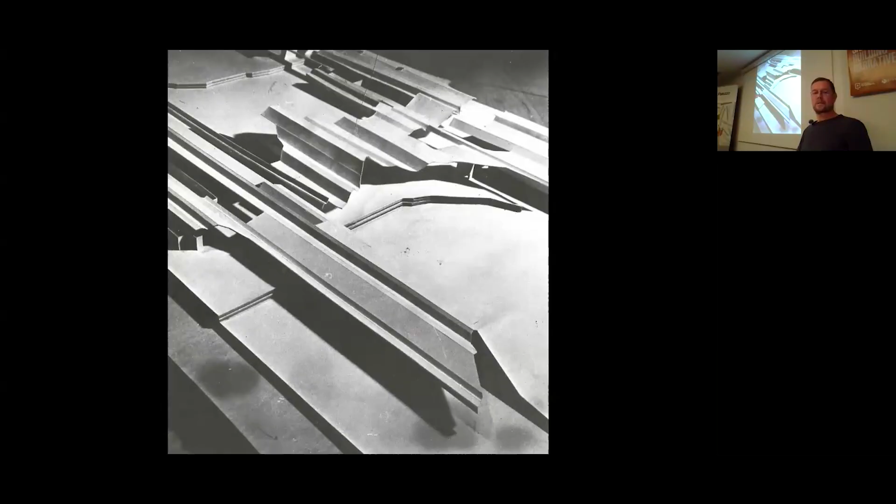But Raili and Reima Pietilä were a couple who became very well known in Finland in the 60s, and then worked through to the early 90s when Reima passed away, and they ended the office. But this is the design they made for the Finnish embassy in Delhi, in India.

And they have an interesting narrative also for this building, which of course guided all the changes that we had to do. But basically, they were thinking that if you're doing an embassy, how do you both show your own country, but also respect the country that you're in? Of course, you have to take into account the climate and building methods and things like that. But it's also important to have the symbolism and the narrative of what the Finns share with the Indian people, for instance.

And here they thought that probably nature is after all one of the strongest things, and they were thinking about the Himalayas, but also, in a way, Finland is opposite to the Himalayas, that we are a very flat country. But all of our lakes go into scratches across the country. So you can see the lakes are stripes across. And also, of course, the hills in between are in the same shape.

So this image of the building is at the same time the Finnish landscape, but also referring to the Himalayas, and bringing out the thinking of a shared respect to these landscapes.

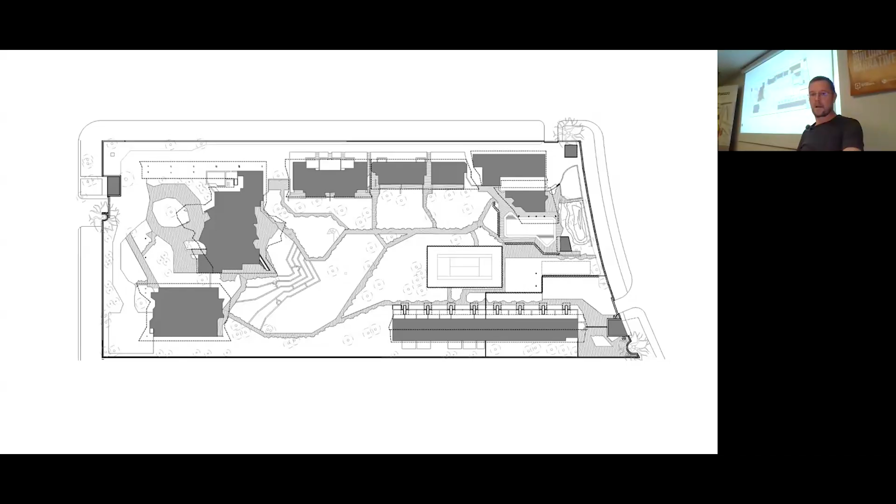And so the main building in the middle looks like this. This is where you enter to go and meet the ambassador, or to go to a party or something like that at the embassy.

And here as well, they were using the local stone, which sort of comes up from the ground. And this pattern that the stone has is something that's traditional to Delhi. This shape has been traditionally used in that area, and it's the local stone. So it's using the local tradition, but creating this quite flying, expansive, big roof that's inviting you into the building and welcoming people.

Most of this was actually more restoration than anything else, and of course security issues and technical things. So we were basically bringing it back to the original shape. Of course, changes had been made, like always in buildings.

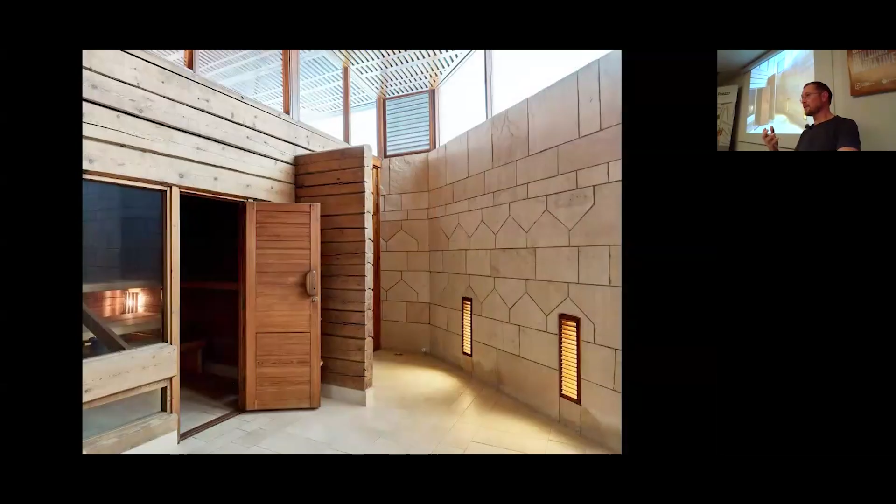This is the lobby space, and it had always been this kind of very white place with the Aalto furniture, like every embassy, as you might expect. So we renovated that. There's also a sauna. Although it can be 45 degrees outside, you still have to have a sauna. And that was logs brought from Finland, so it's a literal piece of Finland in the middle of the building.

And the new layer is basically just the new security gates. They wanted the scanning devices and things like this, and so we did these new gates. And here we decided to have some relation to the original architecture, but a different scale, different pattern, using the handcraft abilities that you can use in India, because in Finland it's hugely expensive to use handcraft to make this shape, but in India that's the cheaper choice, and it kind of makes sense. But basically, these new structures you can't see from the inside. So it was a very light touch to the building.

We also worked on another project by Pietilä called Dipoli. This is an experimental student union building for the University of Technology, which is where I also studied to be an architect. This is basically in Helsinki, in a suburb called Espoo, and it was completed in 1966. And now we changed it into the main building of the new university, which is actually called Aalto. Which is maybe a bit similar to you having Mimar Sinan here, using these names now for the buildings.

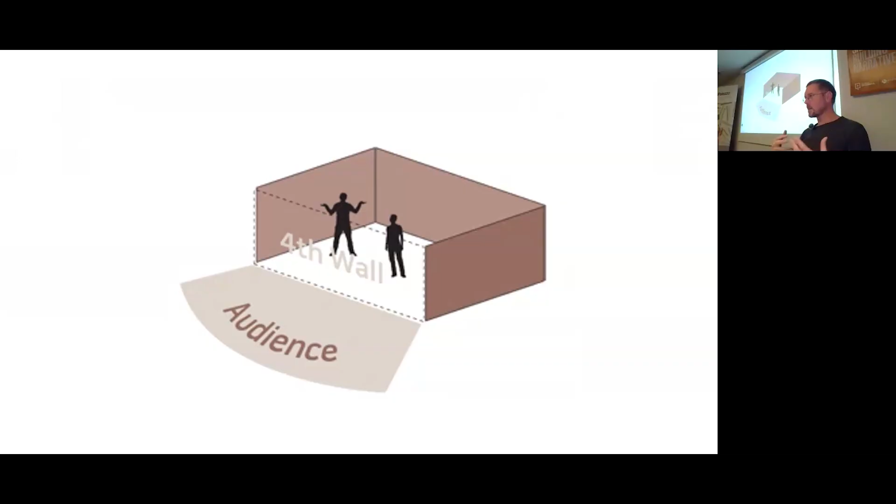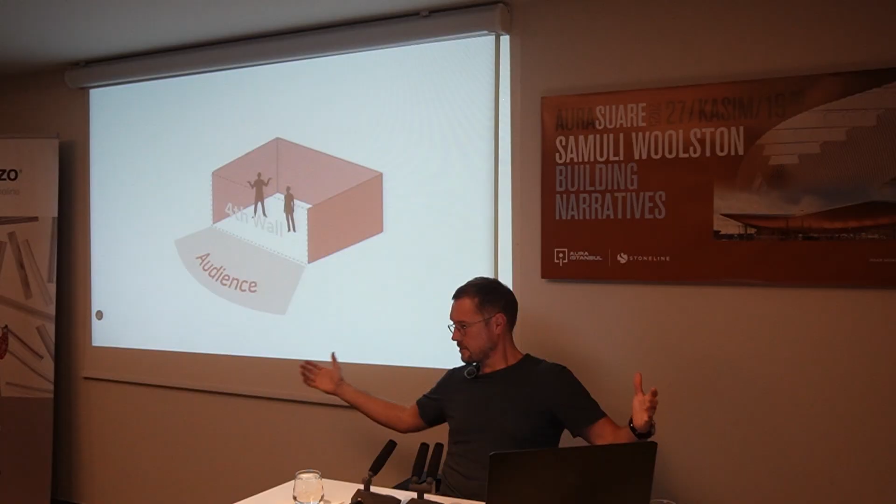And so we sort of started building up that, and then we started thinking more about what the architectural expression should be. What do we want to say? And we started thinking about the idea of the fourth wall, which is on stage: you have the three walls that you could see, which are the set, and then the actors pretend that the audience is not there. And then sometimes they of course break this wall, and they might speak to somebody directly, and we thought, okay, we'll play with that a little bit.

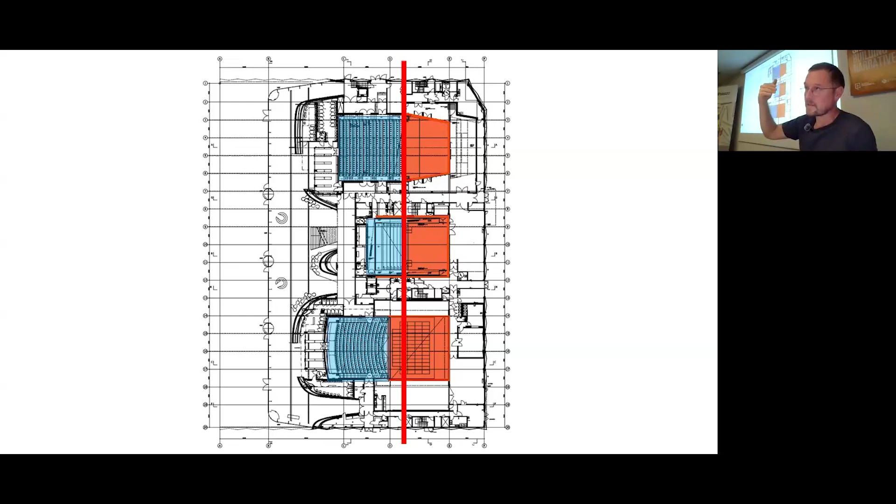Because this is the line where you could think that the fourth wall is in all of the halls. There's the stage in the front, and there's the audience in the blue area, and we wanted to move that fourth wall actually to the front of the building. So instead, all of this could be considered the back of house, and the outside life is on the outside of the building. So basically the idea is that as soon as you go through the main facade, you're in the world of the theater, although you're still actually in the foyer.

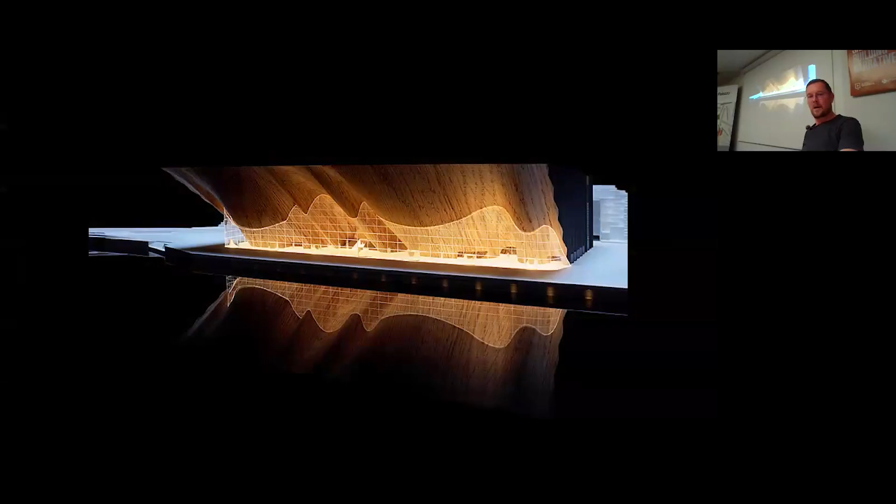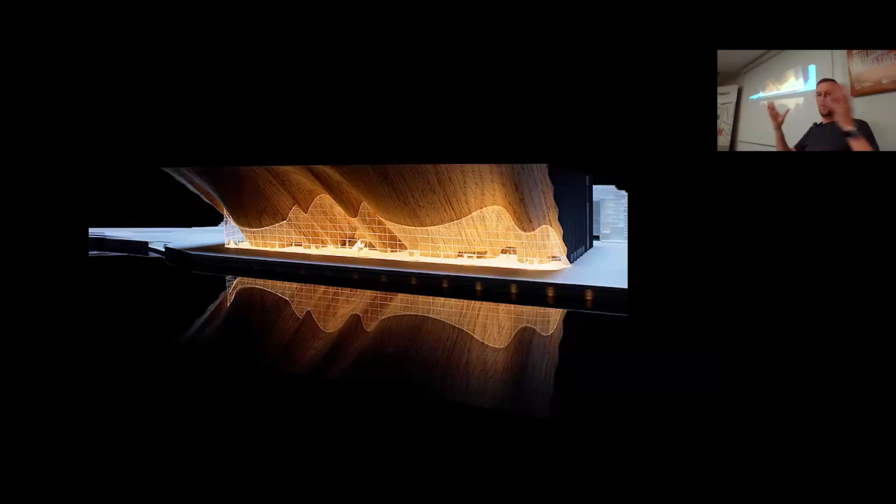But this brought out the fact that we had to give a shape somehow to this fourth wall. What does it look like? And we started thinking that instead of having the theater tower, which is blank and just a box, which is often something that you recognize to be a theater, we wanted to bring out the auditoriums, bring out the fact that this is where the people are, following the play or the concert. And so we came up with this wooden wall, which at the same time describes that we have 3 halls, but also gives it one uniform expression.

And it's using the local oak, because Kristiansand was founded in the 17th century to export oak to Europe for shipbuilding and piling of houses and such. So what made the city is oak. And for the rest of the building, we just wanted to make a simple black box. There's also an aluminium factory across the fjord on the other side, so this was also a local material. So it's really looking out into the landscape and into the evening sun. So you get these patterns, the shadows of the window mullions running across this surface in the evening when you're coming to the concert.

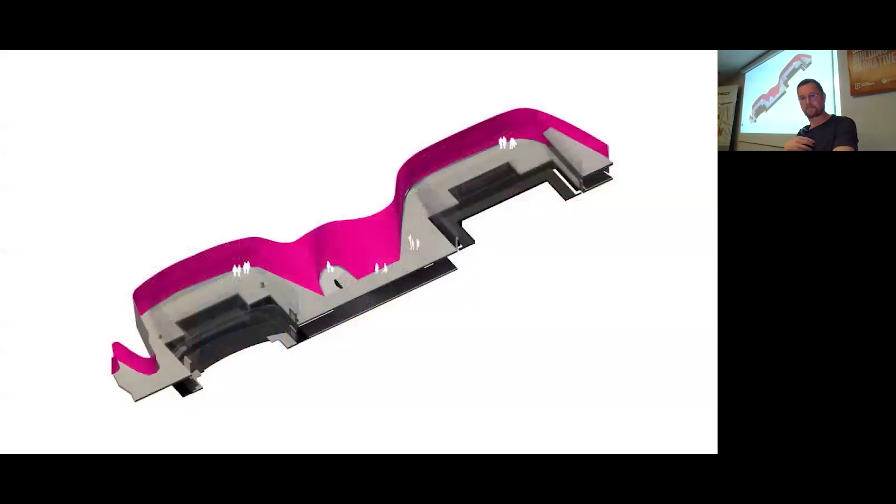But then, for us, separating outside life or reality from the fantasy of the theater, we wanted all the materials on the outside to be natural and understandable as materials, but as soon as you step inside, it becomes just color, and not natural light, but lamps and man-made light. So there's a huge change as you go through this wall. Everything changes into this man-made, unnatural in a way, fantasy side. It was a local artist who worked on the wall and made layers and layers of paint, and then sanded them down into this almost water-like surface.

And the theater hall is used either as just the ground level for fewer people, and then when you light up the top, it's more like an opera, and you have a balcony. And there's a smaller hall in between, and a couple of even smaller ones. There are 5 small halls altogether.

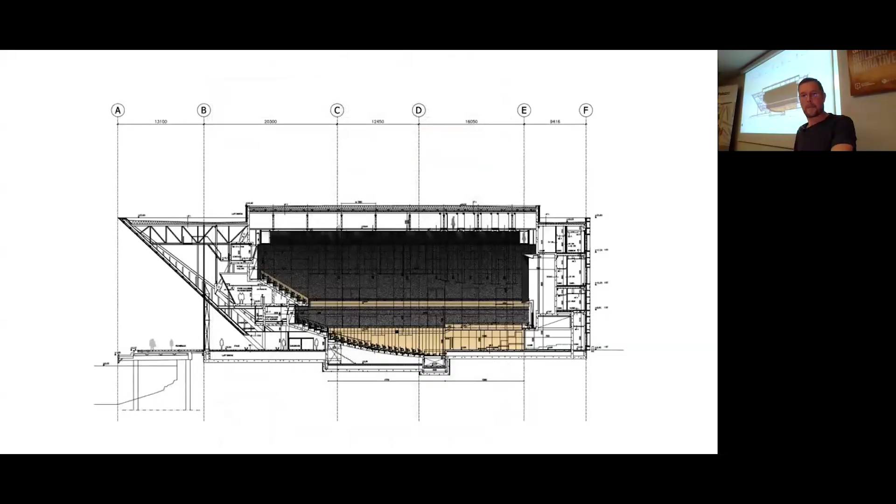And then the concert hall was more about being a sort of acoustic echo chamber. So we have this wooden vessel where the orchestra is playing, and the audience are both in this together. And then there's this darkness of black concrete, which is what the acousticians say, that you have to have heavy materials reflecting the sound for it to work acoustically.

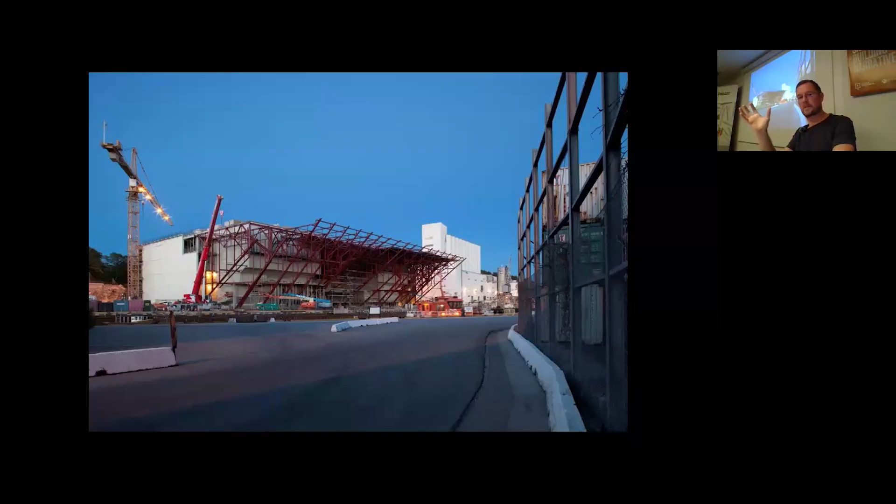There's rehearsal halls and back of house spaces, and this back wall, which in one direction you cannot see any windows, but when you look at it from the different side, then you see all the windows. And structurally it's super simple. It's the concrete halls and then this steel overhang with the wooden units installed on top.

This was actually made by boat builders just in the area in Kristiansand. Every single piece here, this image explains it maybe better, is a different shape. So every plank is actually slightly getting smaller towards the top, and that's how when you place them all into place, you finally get this shape, because the top line is 100 meters and the bottom is like 300 meters. So there's a big change.

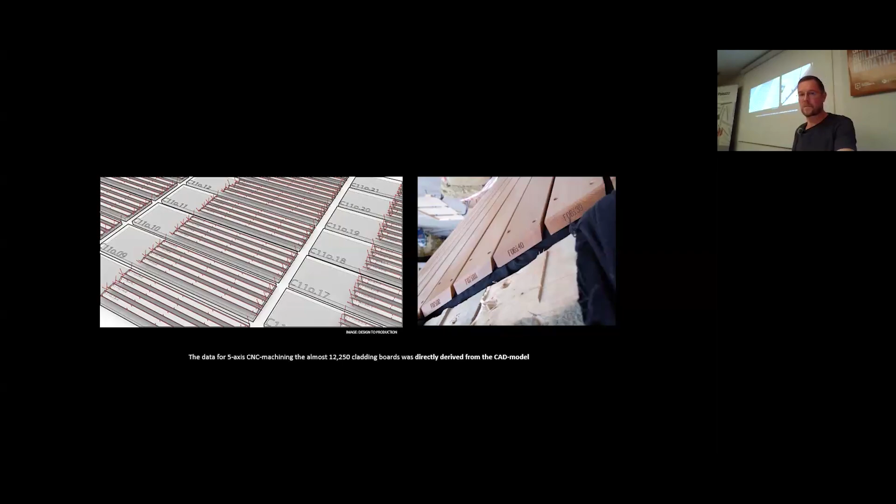But yeah, this was a great adventure for us, of course, and we managed to get it done in budget and learn to speak Norwegian, which was nice.

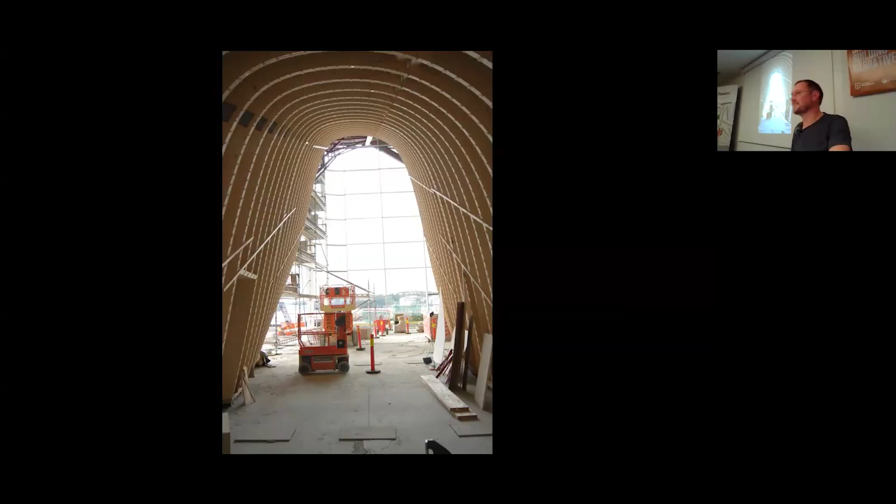And then it meant that we could get more theaters, and this is a 1960s theater that you can see on the side here. And then there's the extension, which is a new hall, and it opens up to the same tower. So you can actually have a play with audiences in two directions, even if you want, from under the tower. And there's this new foyer looking over a lake, so you get a new view in a different direction.

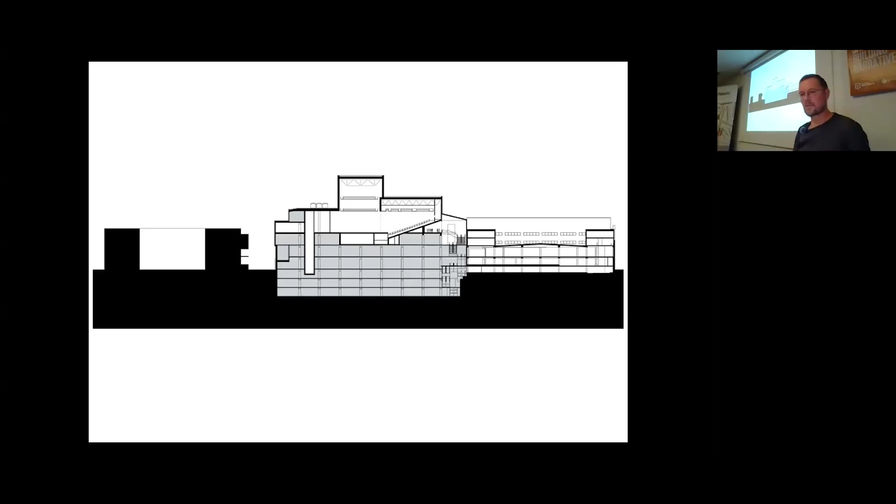After which we were doing another theater in a city called Lappeenranta, which was interesting because they were building this shopping center. There's 3 floors of parking and 3 floors of shopping, and then the theater on top. And we were like, I'm not sure if this is a great idea, but actually, we started thinking about it as a way of the theater coming back to its roots, because theater started in marketplaces. People started acting, and somebody's following, and theater developed like that. So in a way, it's going back to the marketplace, which nowadays is a shopping center.

But yeah, it's a fairly simple structure.

Of course, we have this long history of public libraries. This is from 1881, the first public library in the Nordics. This is the Kallio Library. I think this is, Hüseyin, your closest one. It's a beautiful Art Nouveau or Jugend style building. This is the first time that they started to have, for instance, a children's room separately in libraries. So the library started developing towards what we now know as libraries. This is the Aalto Library in Viipuri from '35.

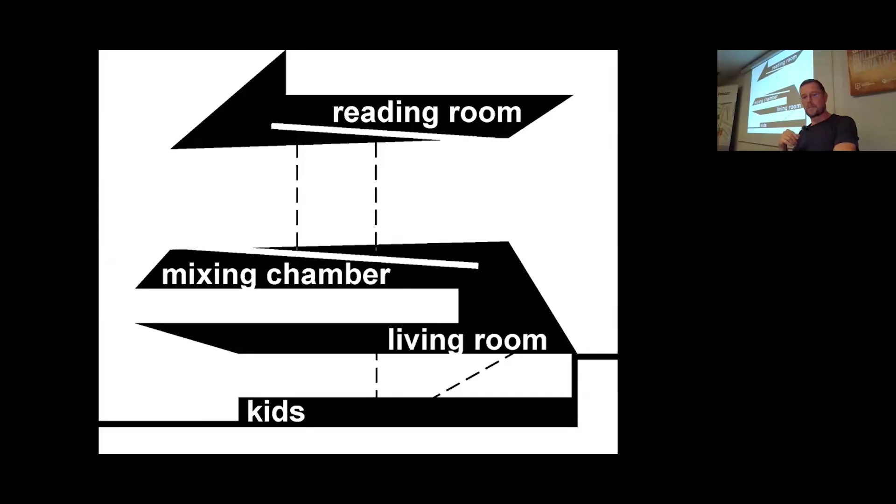And the Seattle Library by OMA, which was quite important for us when we were students. Antti, one of my partners, actually worked at OMA on this project for a while. From here we took the idea that it seemed logical to have these open floors and enclosed floors, because the program in libraries is quite dipolar in that way, that certain things just want an enclosed box and be on their own, and certain things are good to have open. So in this project, there's this division between the open reading rooms and the rest of the program.

But the things that are done in libraries have exploded around the 1980s, 1990s, and it's still getting wider and wider. The French, for instance, have been trying to call them mediathèques, but that doesn't necessarily work either. We also call libraries a book place, basically, in Finnish. So the book is of course still very important, but in this project, only about a third of the spaces actually have books, and the rest is other things.

Well, this is Helsinki. It's just about beginning to look like this now. The sea is freezing. I just got a picture from home yesterday where there's ice over there, so you can ski out to Estonia.

But yeah, it's a cold place. So basically, we need indoor public spaces, and we need indoor public spaces where you don't need to buy anything, and you're very welcome to just come in and do whatever you like. Basically, as long as you're not disturbing somebody else, you could basically do what you want.

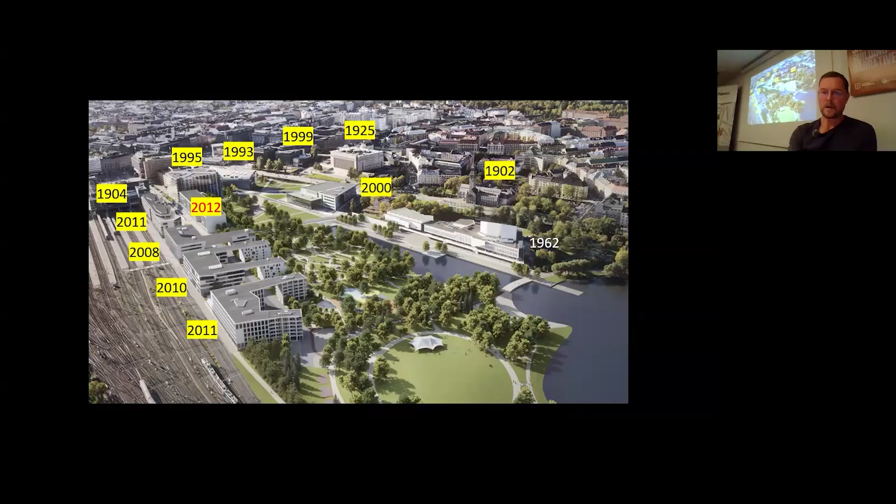And the thing is, we have so many of these architectural competitions. These are the years when all of these projects had architectural competitions. So our National Museum had an architectural competition in 1902. And I think that's the first public, open architectural competition possibly in the world. I'm not sure if I can really say that. Maybe, who knows what they did in antiquity, but at least that's what the Finnish Architectural Union claims. And then 1904 was the railway station competition and so forth.

So basically every building you can see from the library was done through an anonymous architectural competition, except the Aalto Finlandia Hall, because Aalto was so well known that it was just ordered from him and they didn't have a competition, but everything else.

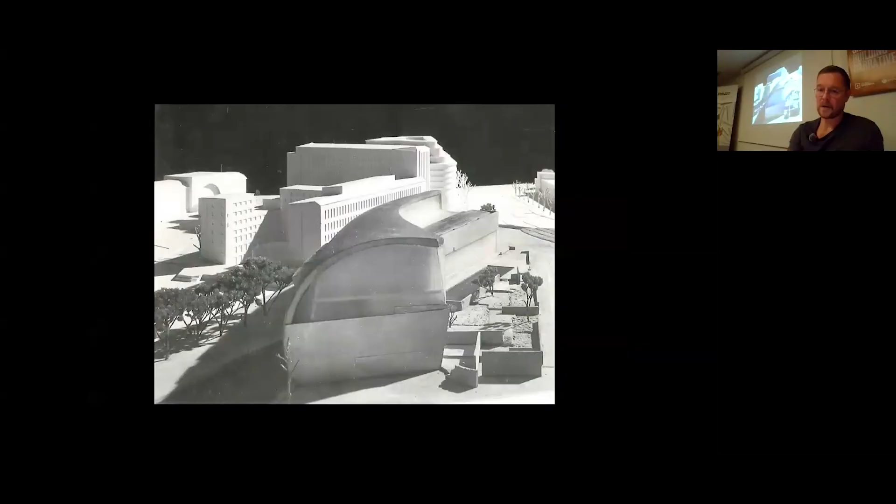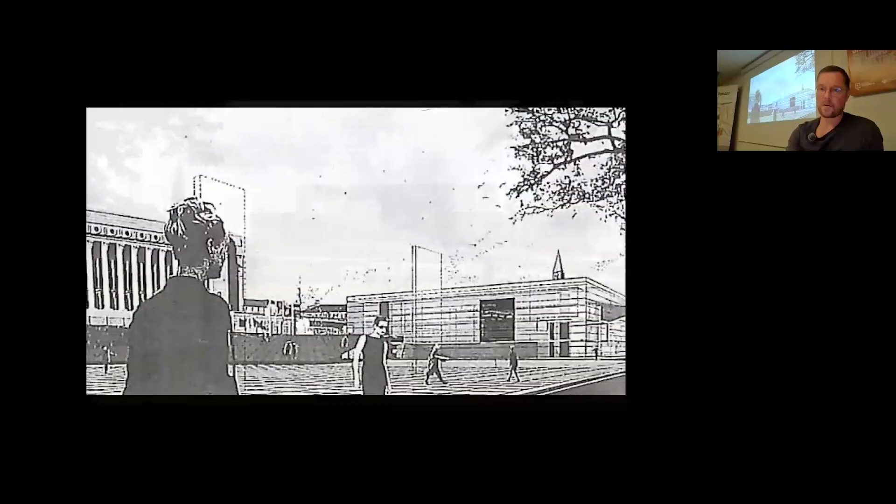So yeah, this is the National Library, the Parliament by Sirén, 1925, Aalto's Finlandia, Steven Holl's Kiasma, our contemporary art museum, from '93. This main newspaper building by Sarc, '95. The music hall from 2000, by Laiho Pulkkinen Raunio.

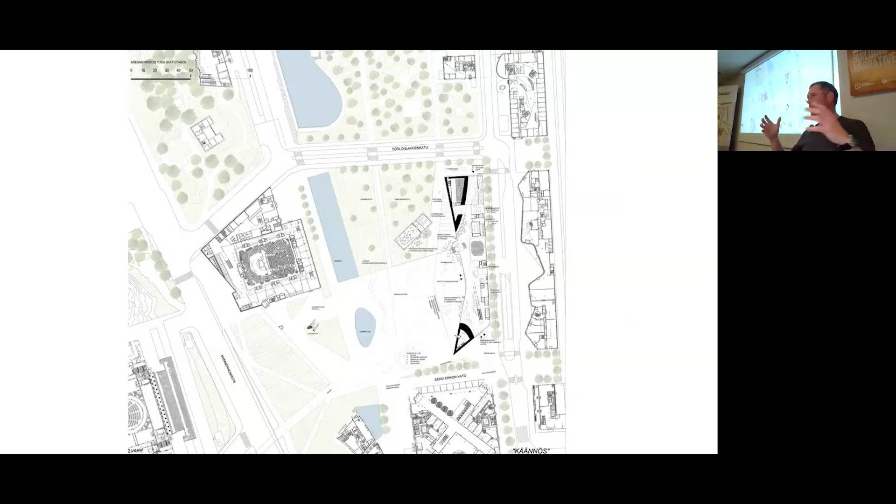So all of these buildings are around, but they're all quite hard. They're very rectangular. They're either glass, stone, steel, or actually copper, but hard materials. And we felt that, I mean, it's the end of this park that's opening towards the north.

And the idea is that you can actually go into the central park and all the way to northern Finland, basically in forest continuously from this location. So it's kind of the heart of Finland coming to the center here. And so we felt something soft, also something wooden, would be very appropriate for this place.

And so we started thinking about the directions, how you should go through the building and what you can see, and this edge of the building we wanted to relate to the parliament, which was in a slightly different position.

And then what I was mentioning, that we would have an open ground floor, a closed second floor, and an open third floor. This was a long analysis process where we spent several weeks organizing the program in different ways, and came up with this set of vision for the project, and thought that should work well for the process.

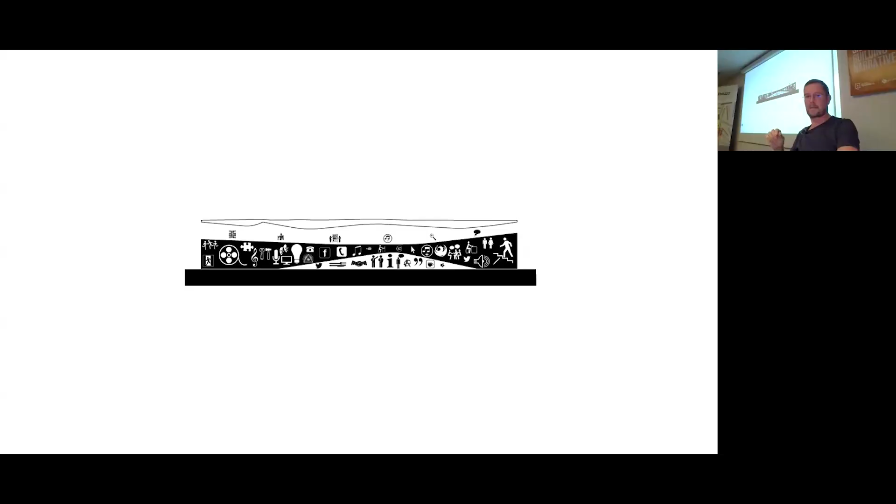The basic thinking is that the top level is where you would actually read a book and maybe understand something, think of something new. The middle floor is where you would create something yourself. And then the ground floor is where you share it with the city, with the public.

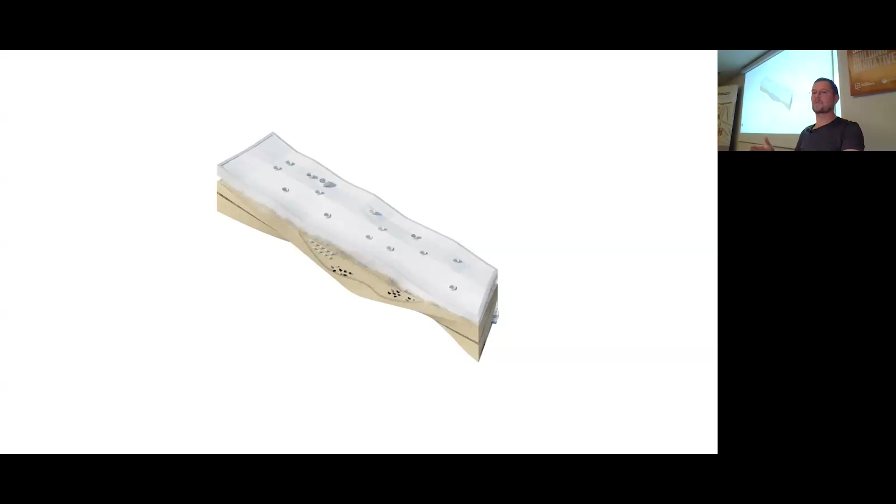And this is the division into three, so that whatever new programming they can think of, it will always fit into one of these things. It's either consuming new information, creating new stuff, or sharing it. And that basically gave quite a strict order to the project, and allowed us to make all the choices that you need to make designing a building like this.

For us, the wood was of course a very natural material for Finns. The country is full of forest, and it was decided that this is the 100th anniversary of Finnish independence project, so it became a symbol, a little bit politically, of Finnish democracy. And also, libraries are the most loved public service in Finland.

So whenever people are asked what they consider tax money should go to, the first is libraries, and then maybe hospitals and water, I think, was somewhere there.

But they also had an interesting process with the public. So, for instance, they had 28 people who had been chosen from very different areas of the city, so that they would represent as different groups from the city as they could find. And they came in every week during 4 months, and we discussed with them how they feel the design would work for their group of people, and should it be changed in some way?

Something missing? Can we take out something? So they became a part of the decision process in what to actually have in the library, what the programming is.

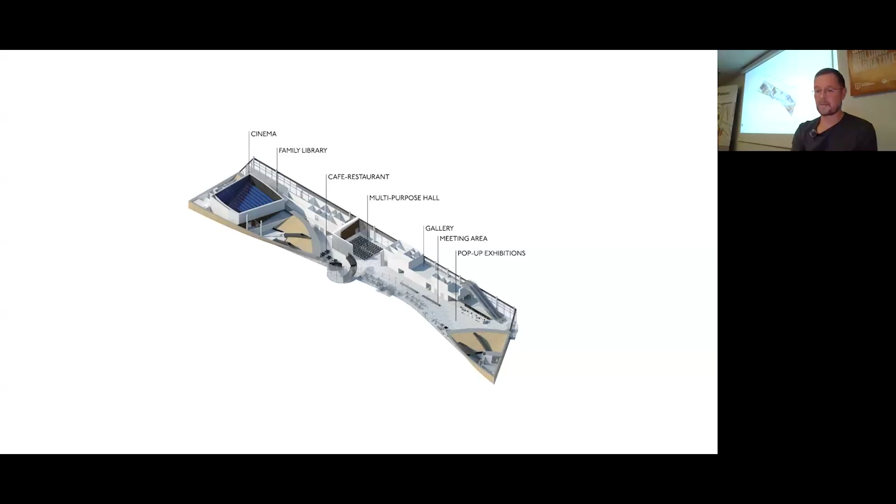But the ground floor is about sharing: we have the cinema, a sort of family library, a restaurant, multi-purpose hall, exhibitions, all the things that are about sharing, representing or presenting things. We felt that the best way to show that the floor is about gathering is this big dome. It will pull people together, and it's an understandable shape. Traditionally, for structural reasons, public spaces have had big domes, so it's still a symbol that's subconsciously easy to understand and read.

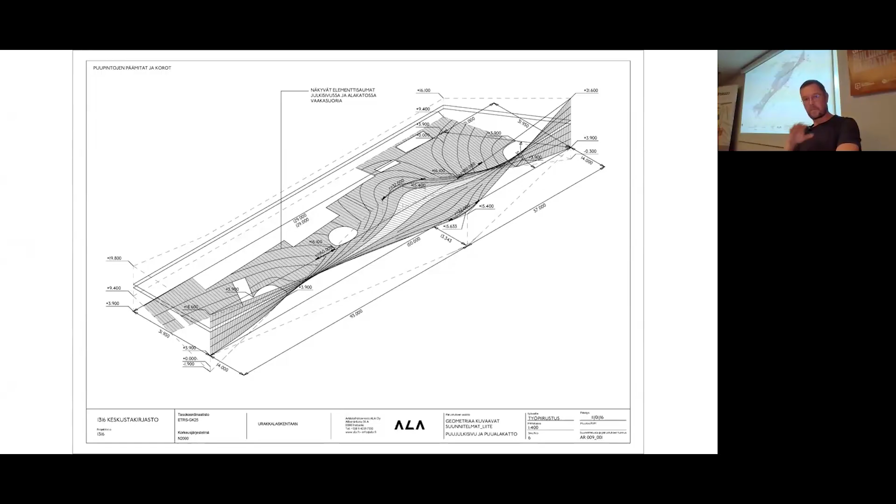It's made of pieces, of course, that have been installed into the ceiling. It's Finnish spruce, the Christmas tree type of tree, which is the most common tree that we have, together with pine. And this is the double helix stair that connects all the floors. If you come in from the park, you'd take this kind of slow entrance. The multipurpose hall.

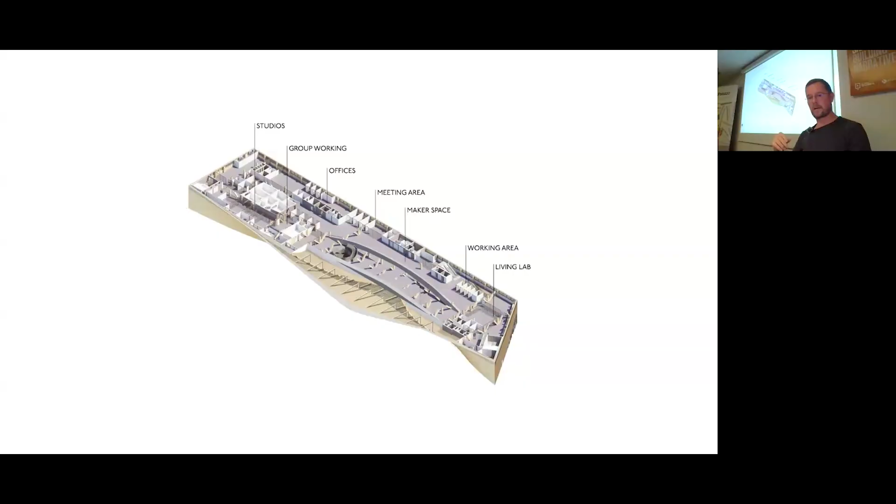And then if you go up to the second level, you're literally inside the structures of the building, and we wanted to make it feel almost like an attic or something that is not finished. Importantly, because we felt that if everything is super ready and feels monumental, they will not ever change anything. It's important that the librarians feel that they can take down a wall and build a new wall, do a change. So there's no ceiling, there's an installation floor, and everything seems slightly rough.

And the structure is actually a 100-meter long bridge, because we were not allowed to have foundations in the middle because of a tunnel reservation. So we thought that we might as well create this big bridge. The problem with that, of course, is that bridges move, and we built a glass building on top, so it's complicated structurally, but everything can move a little bit, and it works, at least so far.

Everything's been fine. In this middle floor you make things yourself; there are gaming and virtual reality rooms. Then there's this big desk with, for instance, sewing machines, because they feel it doesn't make sense to own a sewing machine you only use 3 times a year, so you can just use it at the library.

This is the kitchen. A lot of people have such small kitchens in the city that they can't really invite friends, but you could just book this kitchen and invite your friends there. And everything is free. You're not paying for anything. The only rule is that you have to use your previous reservation before you can make a new reservation. That's the only limit.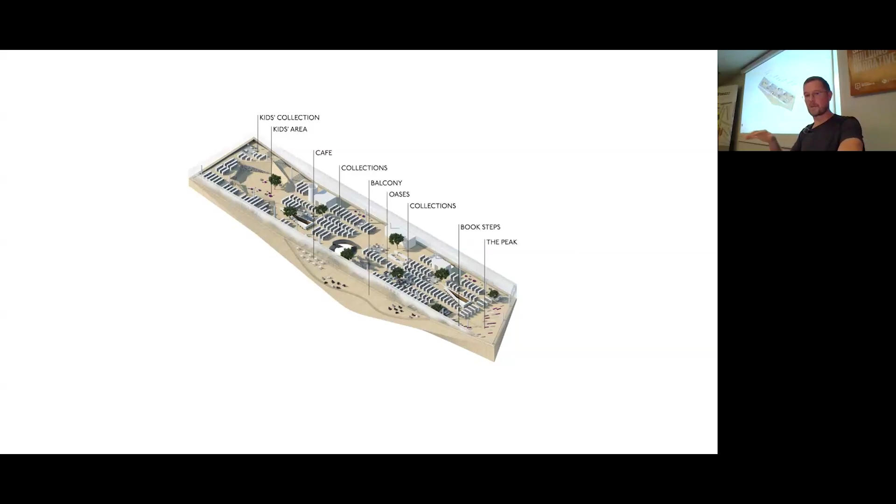And when you go up to the top, this is where the books are. It's only 100,000 books at any given time, but it's a floating collection of 4 million. So according to what's lent, they will bring more of that and take away some of the stuff that nobody's lending. So it's continuously changing. And from the storage, in one day, you can get any book by ordering it. So it's a kind of mixed.

And the top floor is this sort of calm, open space. The shelves are low, so that even from a wheelchair, or if you're a smaller person, you can reach all the books. Which means that you can see over the shelves, which made us think that maybe the roof is actually the main thing in this space, and you have to bring that out. And it became this sort of natural, a bit cloud-like

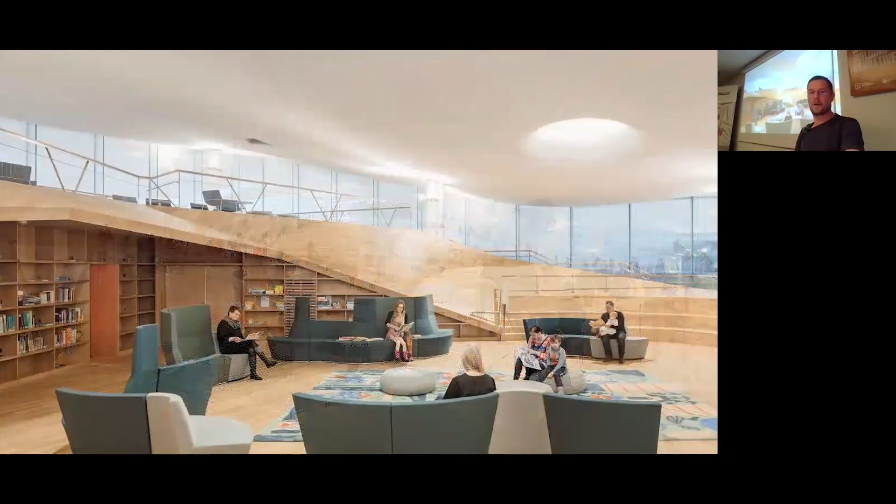surface, which is soft. So the acoustics, it's very quiet. There are not so many children in this picture, but this is the children's area, and they are actually quite loud if you're standing here, but when you're at the other end, you cannot hear them at all. So it works quite well. There's a hidden reading room behind the shelf as well, that you push a shelf in, and you can find this room.

An open terrace. And it's net zero energy and low carbon footprint. I'll say a few words about the airport. This is where you have, I guess, 3 of these big public buildings that have a big wooden roof. And this is the third. We feel that they all come from very different reasons.

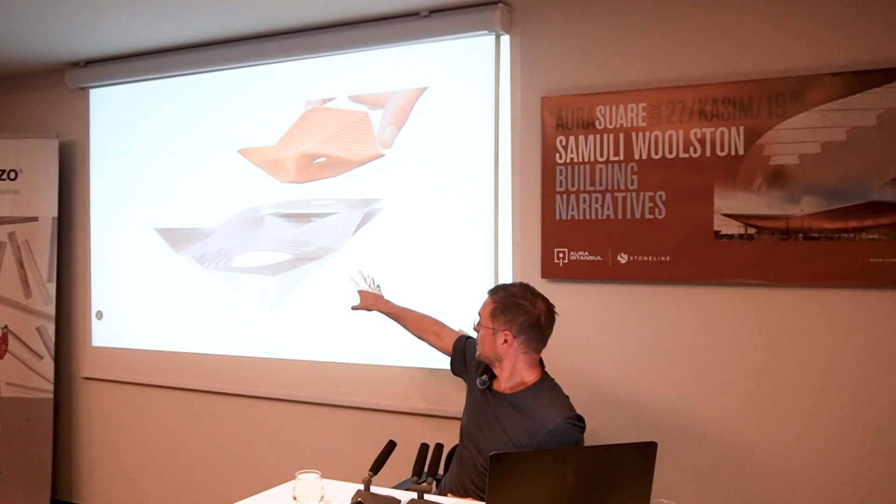Here we were thinking that the airport should have this sort of public open square in front without any cars, and then have this soft, exciting landscape, calming kind of landscape on top, which is then making the roof, so that it feels exciting again to fly. Because we seem to have lost the excitement of flying in some way.

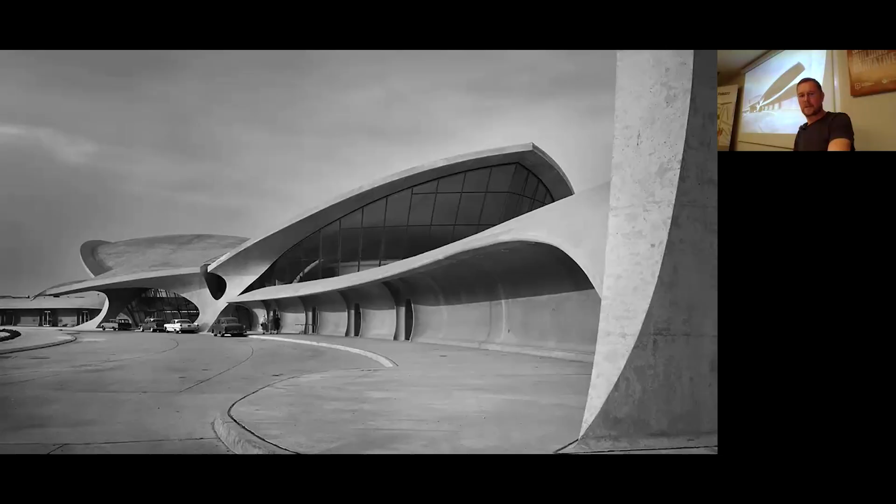Of course, one reference is Eero Saarinen, TWA, yes, exactly, from '62. He was born in Finland, but I guess he was more American in the end than Finnish. But of course, his father Eliel designed the railway station, which is next to our library, and was a very well-known architect in Finland. This was from the period where flying was still somehow new to the public and exciting and interesting.

And so we felt that we could maybe have some of that, but bring this wood and calmness and nature also into the airport, which doesn't often feel that way. The airport had become a collection from all kinds of different decades, which they often are. Actually, here is the building that was finished in '69 by Keijo Ström, and the project architect who was running the team was actually Turkish, called Albert Filosof. He's my uncle.

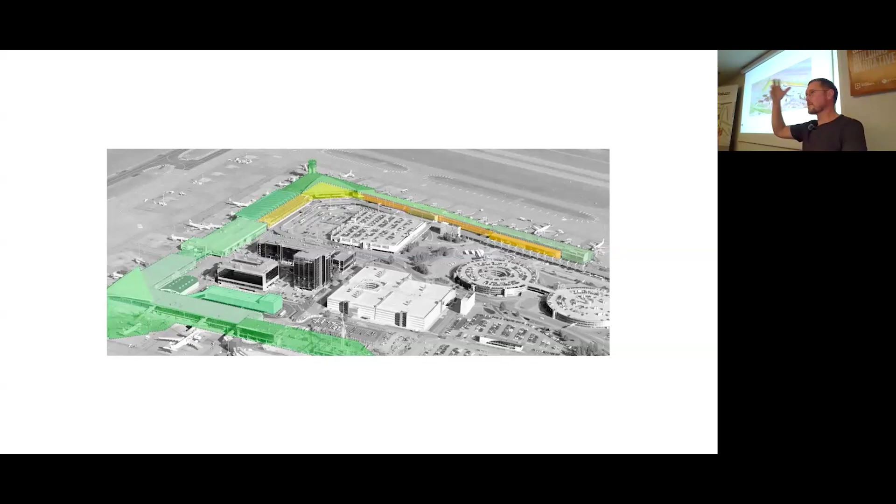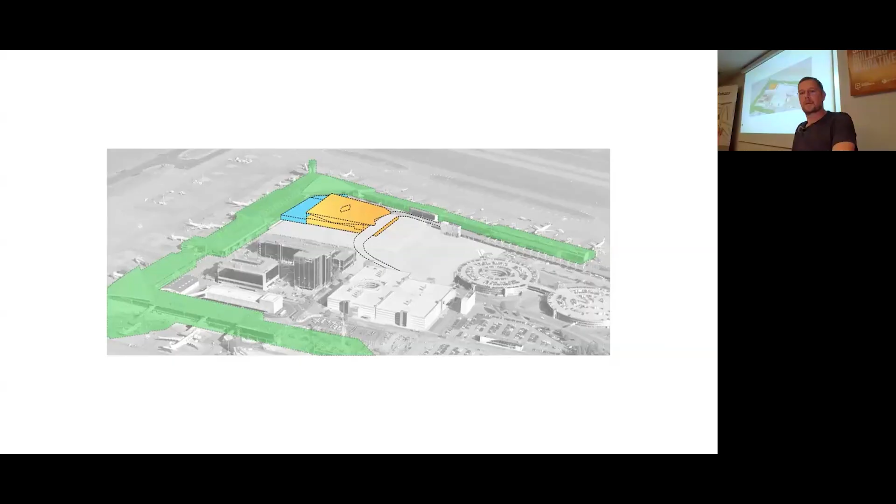He was running that project, and we attached the new building to that 60s building, and that's how you go into the project. But all of these buildings are from different periods, so it's kind of a mess. So we wanted the new entrance building to be different and softer. Many times airports are about the technical fantasy of flying, and you have a lot of steel and wings of metal and things like this, and we thought maybe that's not what's needed anymore, and actually people need to calm down and get their pulse down instead of thinking about the technical side of flying so much.

So that's the location of it. Basically, this is how you enter. It's just a big check-in hall, check-in counters on both sides, and then the blue part is the security check, and then you go into the older buildings, the ones that were there before the project, which are all airside after this project was built. And as you come out, you come straight out to the square, to the train, to the buses, to the taxis. Everything is close.

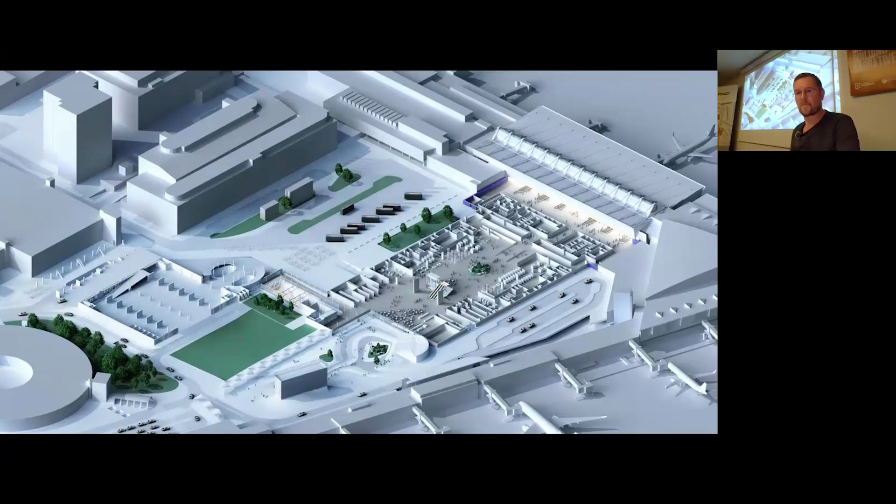And so this is the form that we came up with. It's actually quite heavy. It's not trying to look light, but it is a little bit maybe flying. But for us, it's in many ways more about contours and landscape and maps, and it's kind of an upside down landscape, if you like.

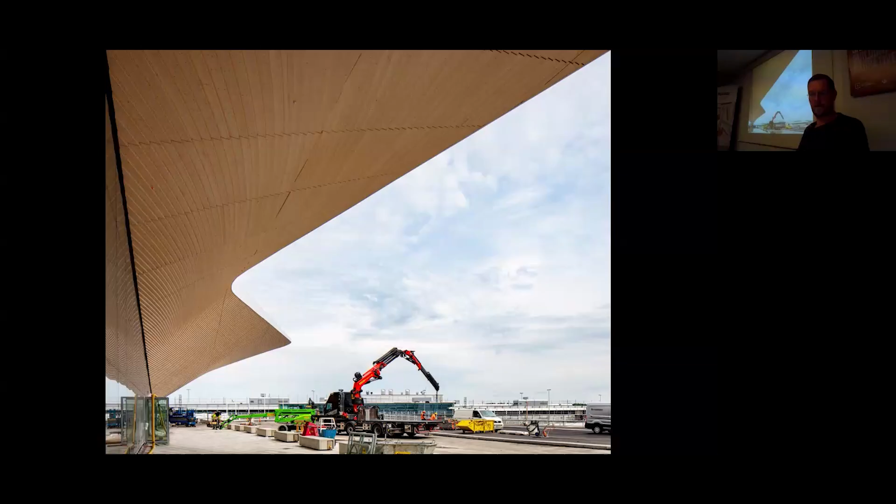Steel structure inside and the wood on top. It's made of this LVL board, which is just planks of wood glued in two directions into a board like that, and then there's a little gap with wool, and the next one is just a stack of these boards, with this oculus in the middle to give a bit of natural light when we have it.

And this was partially inspired by Tapio Wirkkala, who is this modernist sculptor, who made this sculpture, for instance, in '67 for the Montreal World Expo. And it's also a sanded plywood, sanded airplane plywood, actually, because then they were still making airplanes out of plywood.

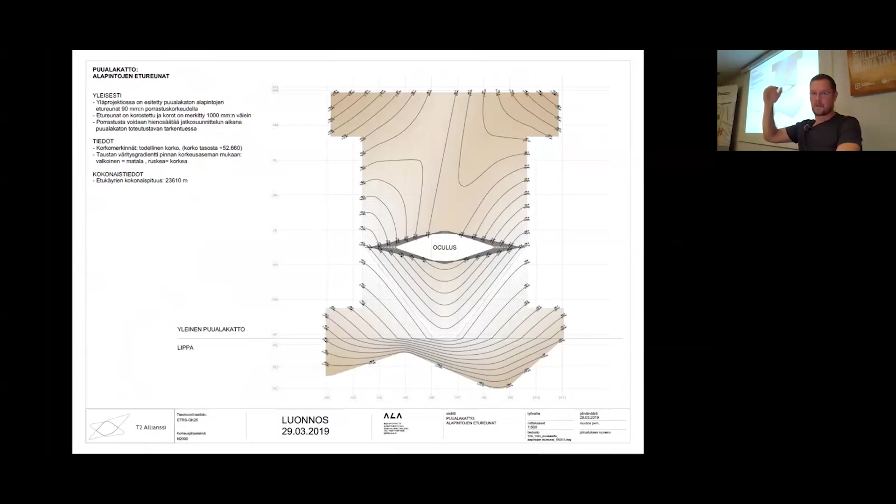And like I was saying, it's more of a map. This is like Lapland, the hills in northern Finland. And this is the contours of our ceiling. So the dark lines are actually 1 meter contours, and the actual boards are 10 centimeter contours. So you can see it built. So in a way, you can think of it as a Finnish landscape.

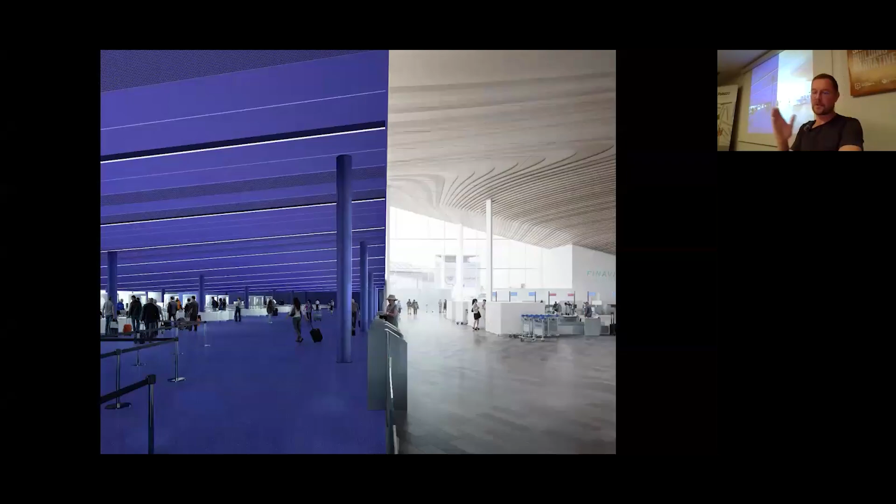And we decided to add some actual trees as well. So when you enter the country, you come and meet real Finnish trees. The security area we're not allowed to take photos of, so these are renderings. But there's a very clear cut to the blue security and the sort of lightness of the rest of the airport.

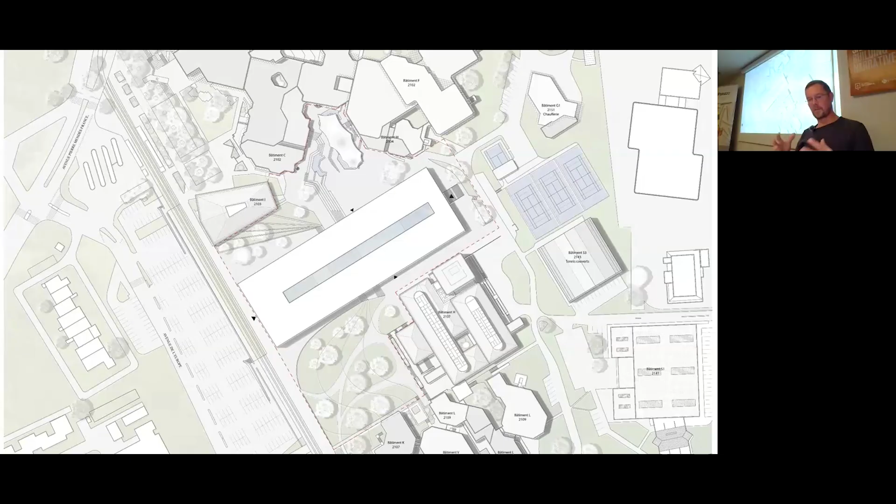I can show you this, the library in Lyon. It's a 60s campus just outside the city. And there's these structuralist existing campus buildings, and they had already decided to tear down their existing library, which was also a little bit brutalist architecture, but it had gotten into really bad shape, and they couldn't think of a way of fixing it anymore. So they had a competition.

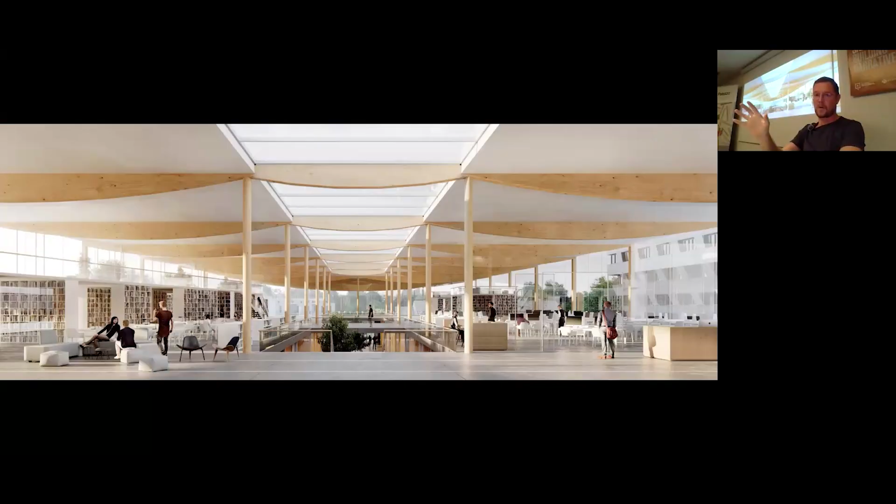And this is an academic library. So there's a lot of books which are mainly on the lower floor, and this upper open floor is more about the students meeting each other and arranging stuff, a reading room, and the reference library. But the budget was very tight, and so basically the wood is only on the beams and the columns, and then it's a very simple structure otherwise.

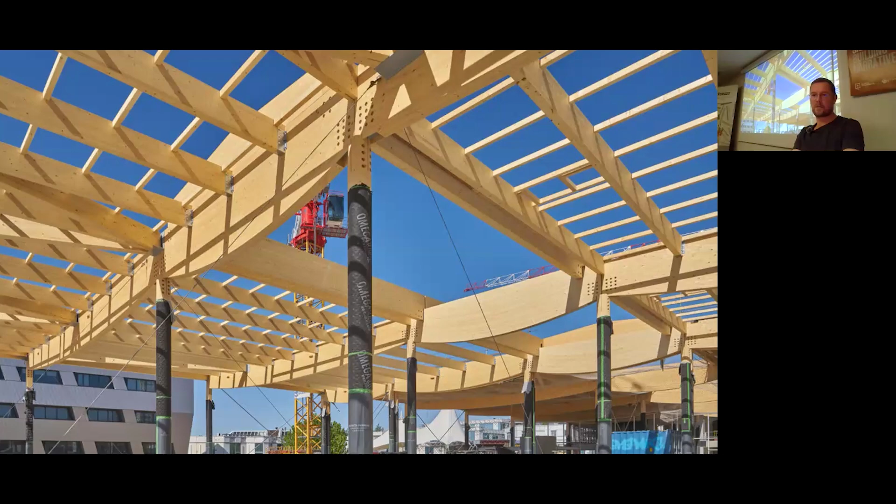And, yeah, the lower levels, there's some researchers' chambers and storage and other rooms, so that's going into the ground, and it has these concrete slabs, and there are small gardens here which are also shading from the sun on that side, and then the open top floor. So the section is something like that, and this is actually already maybe 3 months old from the site, so it's being built.

I don't know how much time do I have, but I could maybe show you Kotka, if that's okay. You can continue. Yeah, it's okay. No problem.

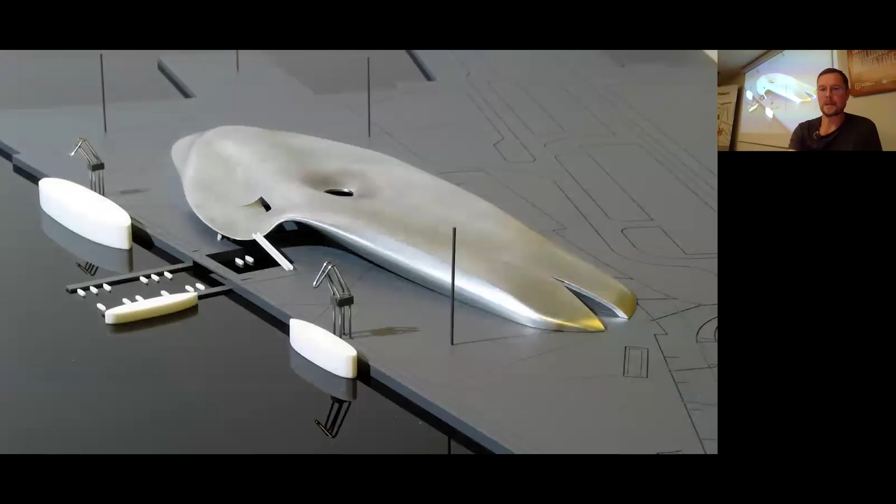There was a competition for a maritime museum in 2004. This was actually the first competition we did with Juho and Antti, and we decided that we place the program into very strict stripes, and then we just vacuum wrap it somehow, and this is what it became. And we got an honorary mention, so then we thought we should maybe do another competition, and that's how we got the Norwegian project.

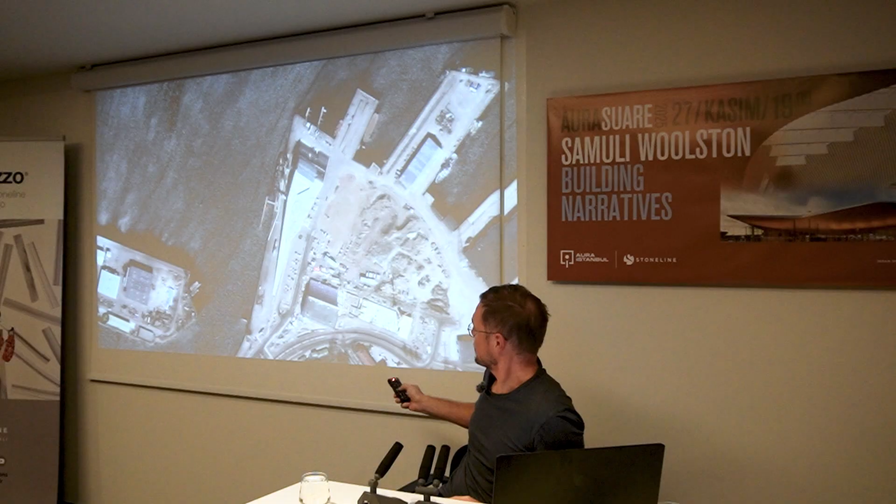But this was on this site, and now a few years later, we got this new project for an event center. It was actually our professor Ilmari Lahdelma who won the competition, and he built this wave-like huge maritime museum building here. Well, this is our project, and that's the maritime museum.

The problem in Kotka is that since the Russian border has, of course, been closed, they don't get tourists from there like they used to. There used to be a lot of Russians in the area, and they were buying things and staying on holiday, and there was a lot happening.

But that's off now, so they are kind of struggling with how to survive, and this is part of their strategy now: they thought they should build this event center so that they can get events, and so people and money into the city. They also built a new university building, and they will build a hotel. So this combination is something they think will help with the future of the city.

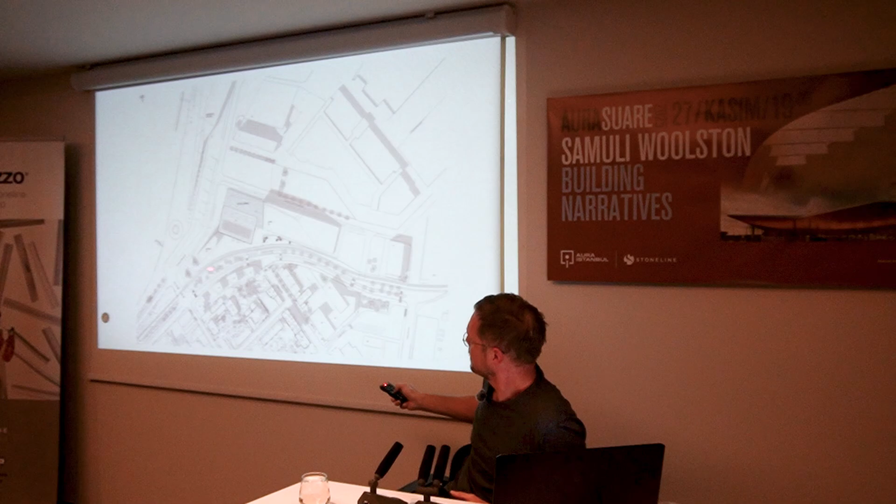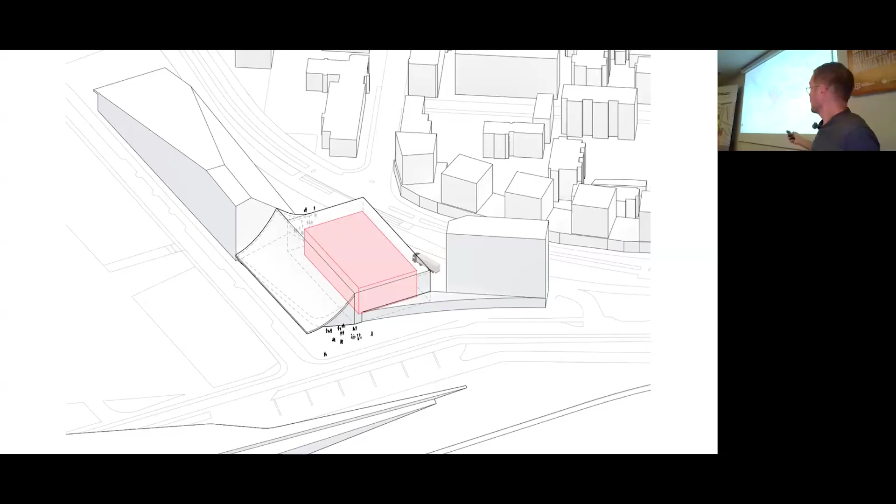So that's the site plan. This is our project. That's the university by another architect, and we're hoping to design the hotel. We've made a design, but it hasn't been built yet for the hotel. And so, basically, it's a very simple building. There's one huge box, which is the hall, and everything is centered, of course, on this.

So you have the loading on the other side, which, because of this railway track here, is cut off from the city. So actually, from the city, everybody has to come around from here, which is why the entrance is on the other side. So it's a bit of a funny arrangement that you have to come round.

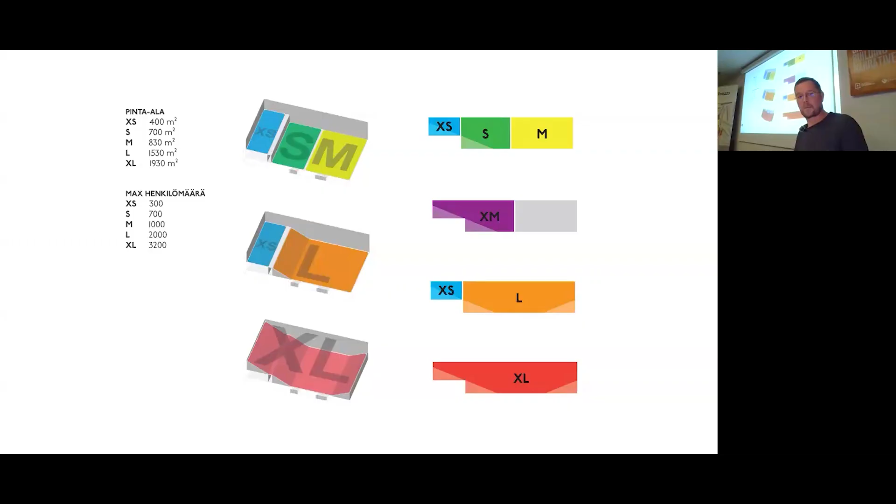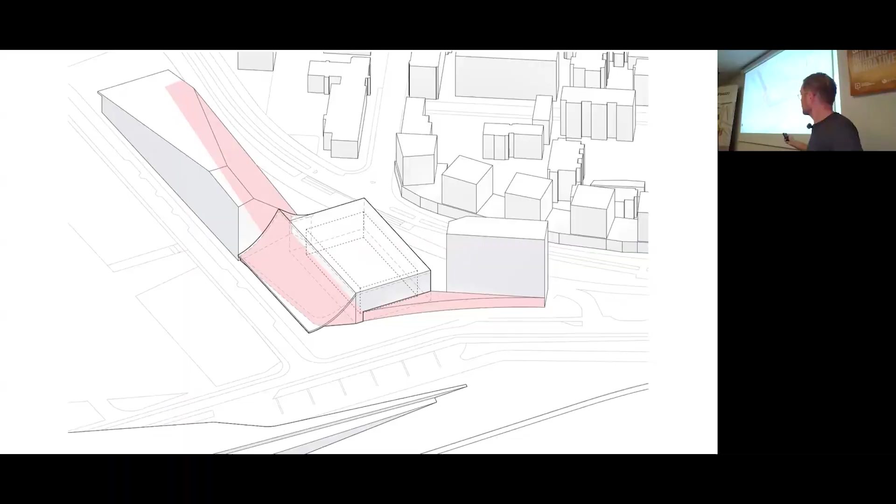But the basics of the hall is that you have to be able to divide it into all kinds of different sizes and for different types of events. The floor area is about 2,000 square meters, but you could have up to 3,200 people in the extra large event. And the lobby would continue from the hotel through our lobby to the lobby of the university.

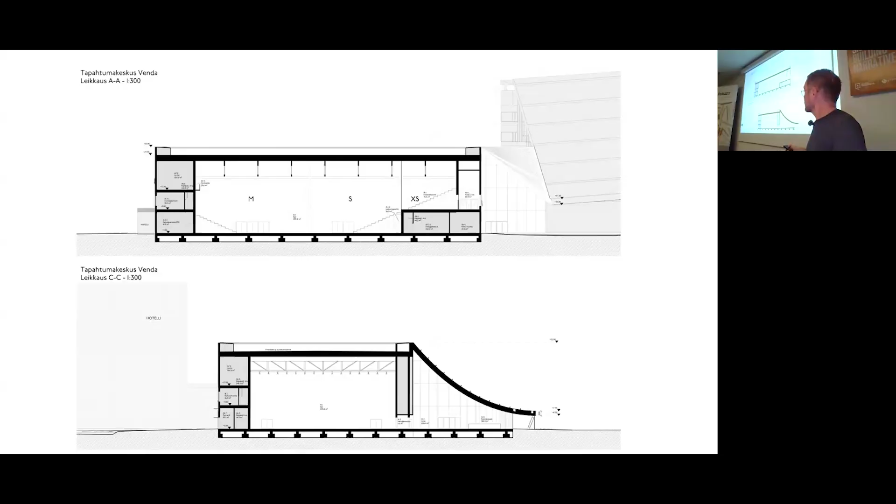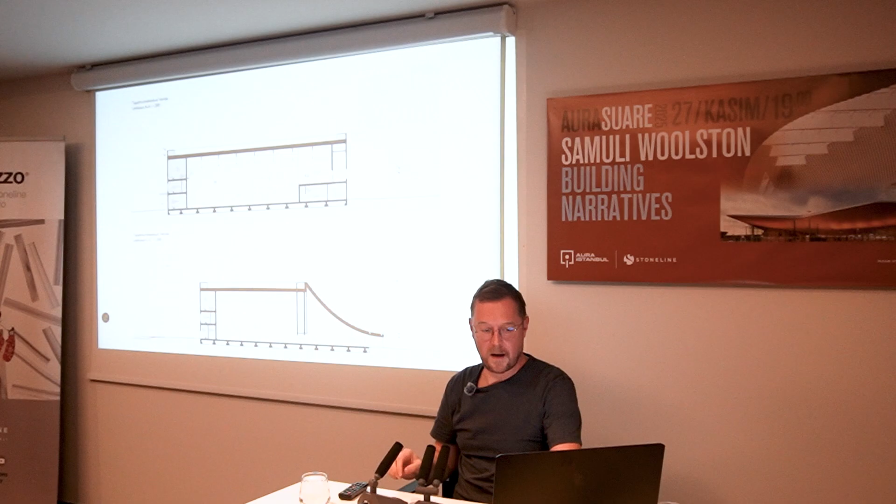But then, of course, we have the box, and since we need a big lobby because it's a lot of people, we decided that it would actually be nice to just hang the roof. So we have this box and we have opened one edge, and this is where you enter. And that's basically it. It is literally hanging. So it's actually a wooden structure which is in tension.

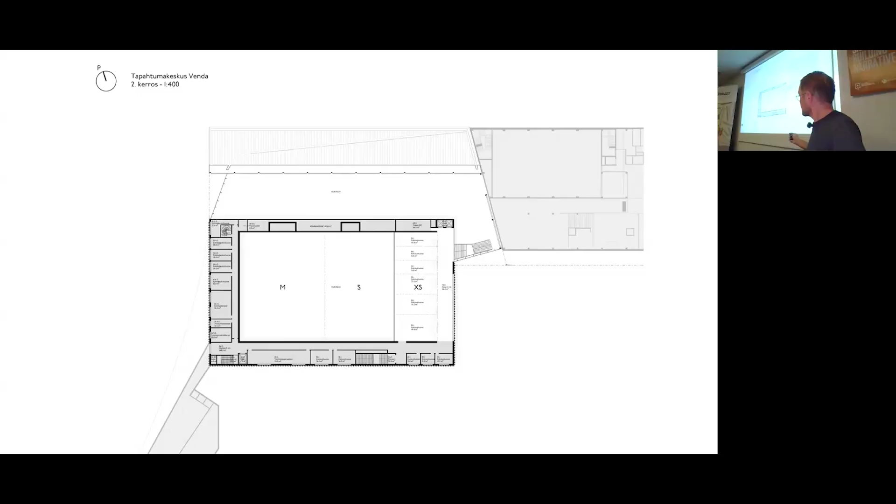The plan itself is very simple. There's the hall. We have the loading on this side, the stage backspace is here, and then a kitchen and such on that side. Toilets between the hall and the lobby. And then some meeting rooms, offices, changing rooms, and technical on top. So it's basically more or less a simple wooden box.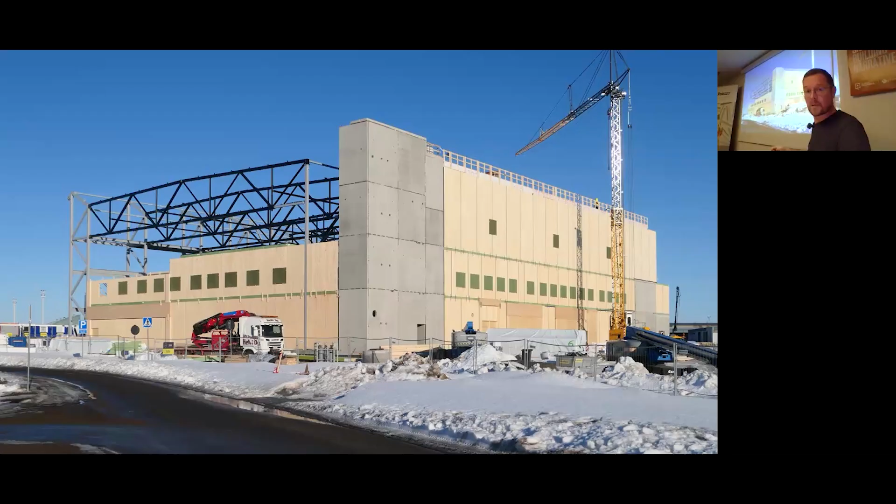Because of fire regulations, the local authorities — we don't always have to use concrete, but here they said that we have to have the stairs in concrete — but the rest of the building is basically completely made out of wood, other than the roof structure and the vertical structure which is holding up the hanging roof.

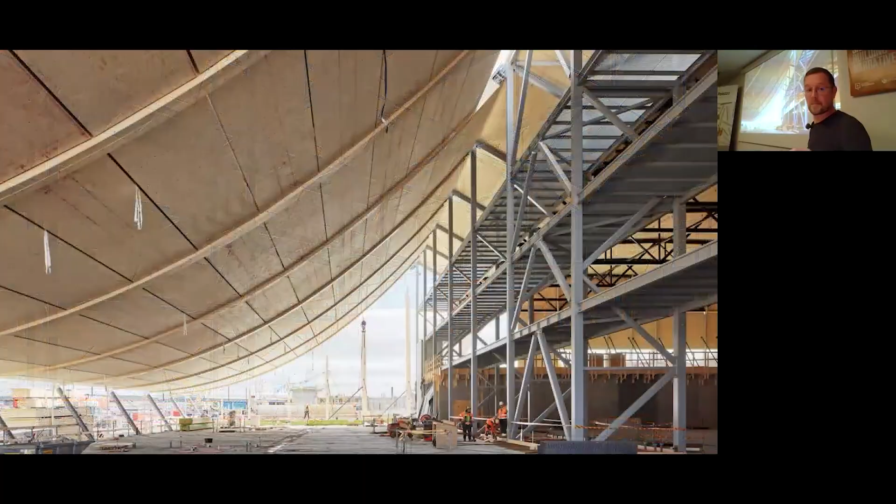So maybe here you can see that best, that it's literally hanging, and these columns are keeping it out, and then there are some cables going straight down to the ground, which are tensioning it so it stays in place. And of course this means that we can have less structure, less material, because it's hanging. So it's more economical, more ecological, and easy to build.

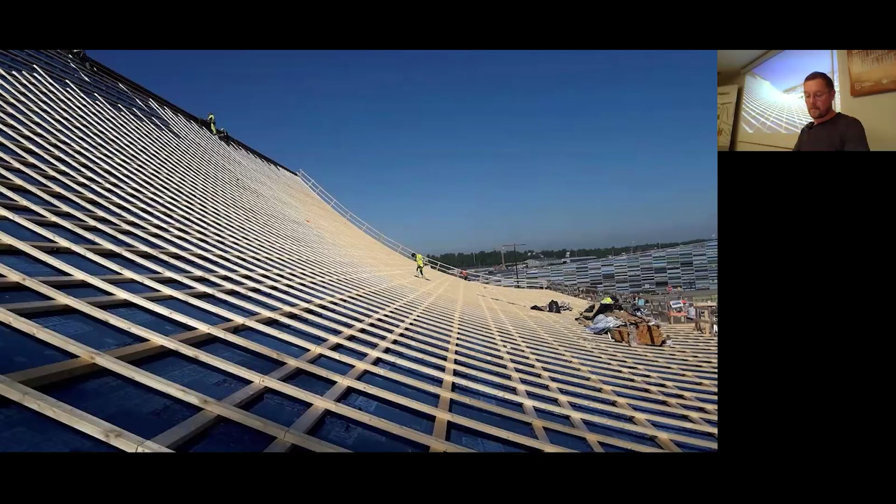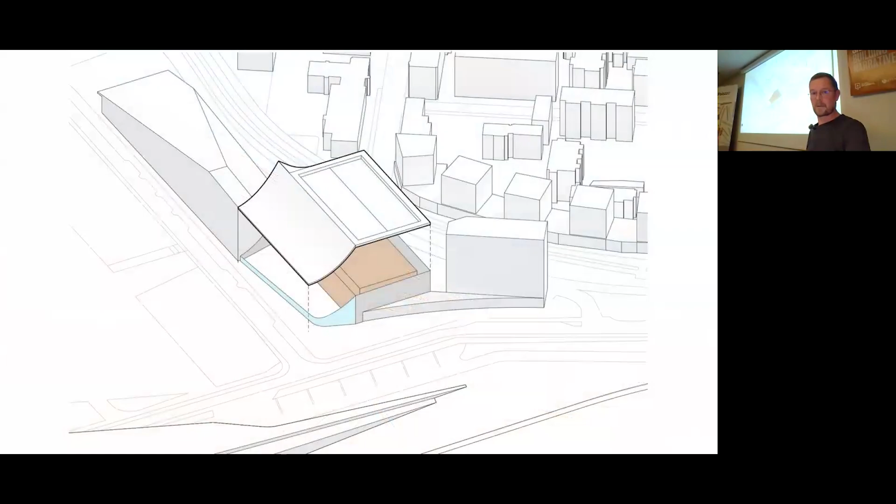And then the roof is just covered in the base with wood, and then, what's it called, this kind of tar paper, and then a zinc covering on top. So you end up with basically this zinc box, which is actually completely wood inside. So there's a big change in here, and because it's massive zinc, you don't really need to do anything to it. It's not painted or anything.

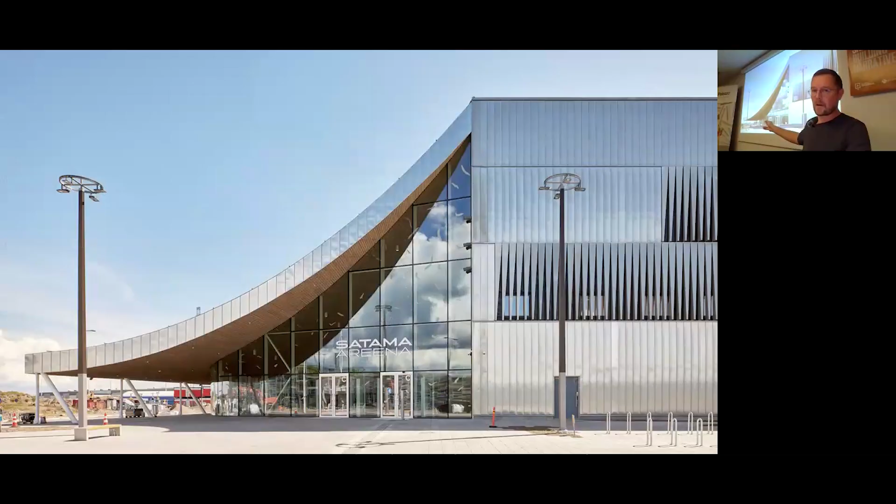It's just zinc. At least the company says you don't have to do anything for 100 years. Hopefully longer. Let's see. The shine will, of course, go away a bit, and it will get a little bit darker, but that's it. And we wanted to not give so much attention to the windows and stuff, so we have these fins covering the back of house to make it into a unified shape, and then to be able to have the connections.

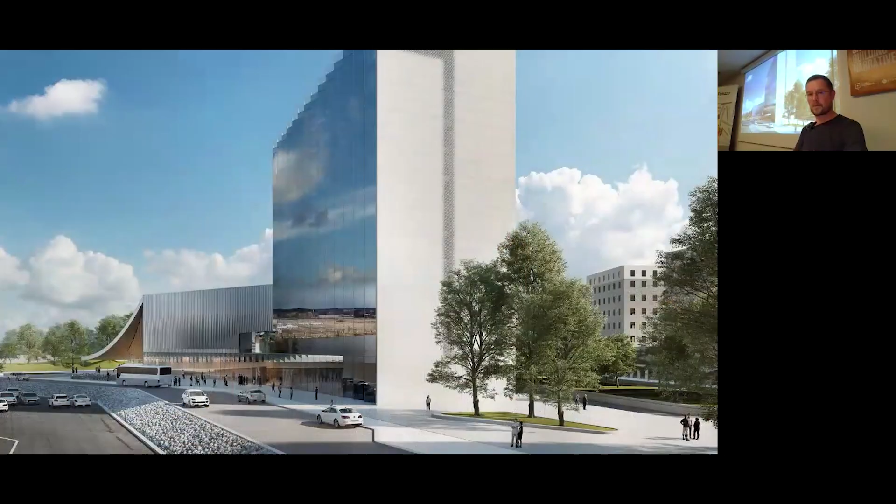This is not exactly the direction you come, but it's basically because actually the hotel will be here. So when you arrive, you'll arrive like this, and then go in. So you kind of see the wooden surface when you're coming from this direction. So it's giving you a kind of understanding that the warm space is underneath this roof, that this is where you need to go. It's kind of catching people in that direction.

And it was interesting to discuss with the landscape architects what to plant in this area, because it's all harbor, but they have very interesting plants, because all the ships have brought all kinds of plants from around the world to the harbor. So they have amazing, very rare plants, which were just from somewhere else, which they wanted to keep. And so we planted a bit more of these rare, not super exotic, but still not common in Finland, plants, because there are also insects who live in these particular plants and a lot of other things. So the ecosystem will remain the old industrially created ecosystem that it now is.

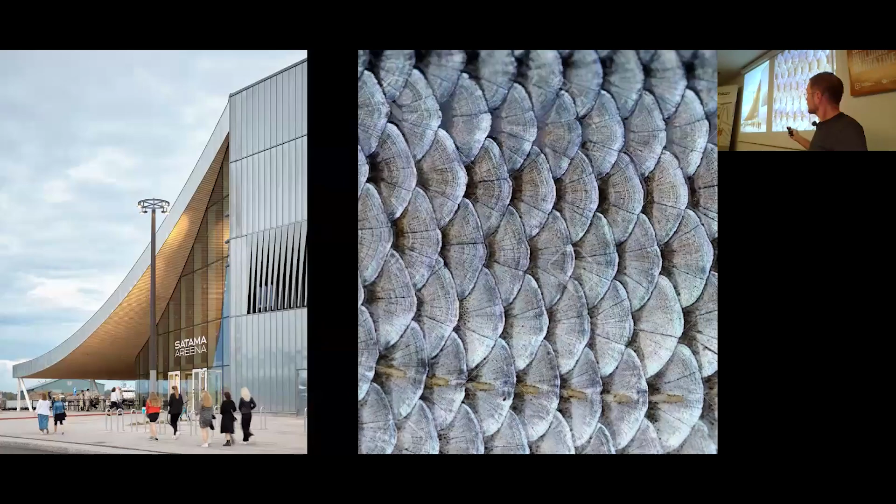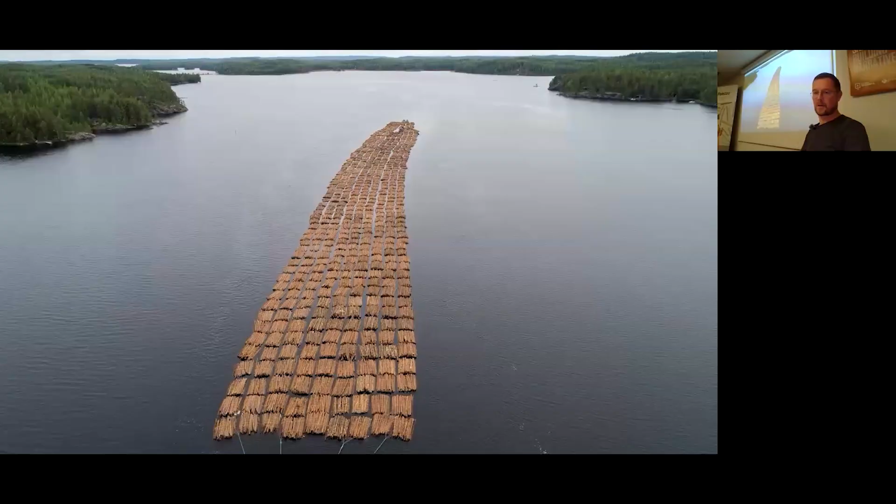And yeah, we have these a bit fish-like scales; there used to be big boats just in front here. And the stairs are similar structures to the steel boats that came a bit later; they have this same aesthetic to them. And this was a 1960s sculpture from this city that we managed to get back here and placed it into the lobby. And the hall is basically a black box, but we wanted to show the fact that they had all this wood back in the time.

This is the way you transport wood in Finland: you make it into these rafts and you pull it with a boat over the lakes. So that's the easiest way, so you don't have to take it onto the road. Of course, lorries are also used, but this is the most traditional and still used when you can. And this is sort of reflected in the walls in the hall. But actually these shapes are describing how the auditoriums are used in different situations in the hall.

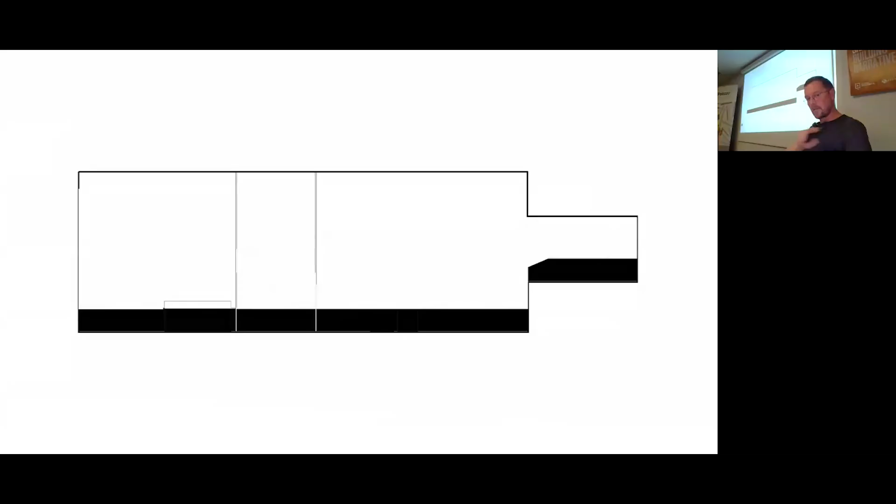So the first level is if everything is a flat floor, then these areas have the wooden reflectors. In some positions, when the auditorium is like this, you need them here. There's another position there, another like this. So then it becomes this combination, which is also describing the different uses of the hall as a pattern, because the acousticians said that within 3 meters from where you're standing, you need this modulation. But where you're standing varies in this building, so you end up with a shape.

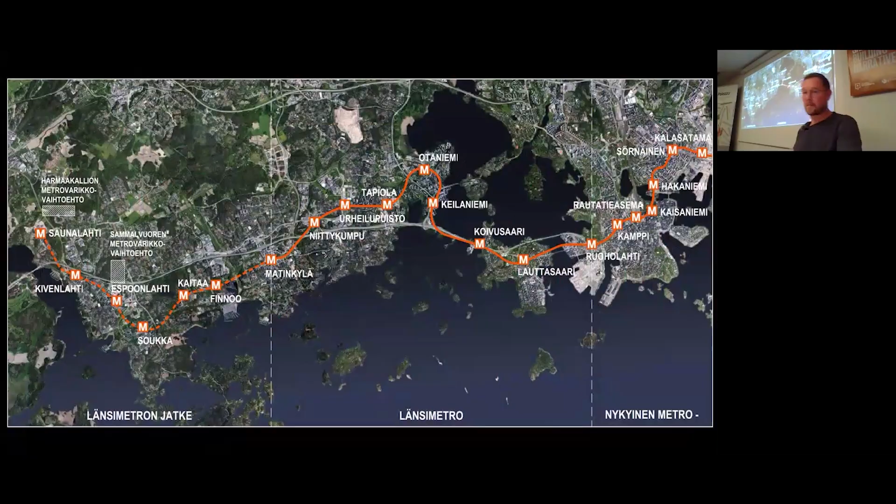But I have a single image of each of the metro stations that we did in Helsinki that I could maybe still show you. Basically, for the metro line that goes west of the city, they wanted you to understand, when you were still in the train looking at the station, where you are. So every station has to have some kind of a message of where you are, but they have very strict rules that you have to have this surface, which is solid, and a stone floor. So basically what you have left is this space that you can use.

And in this case, it was actually the artists Grönlund and Nisunen who did these neon tubes to visualize the business district, which is above, because it's all about towers and pedestals and very modernist buildings. So this is their version of that. This is the Otaniemi station. This is a reference to the Alvar Aalto brick campus, and it will take you up to the bricks if you follow this roof to the top.

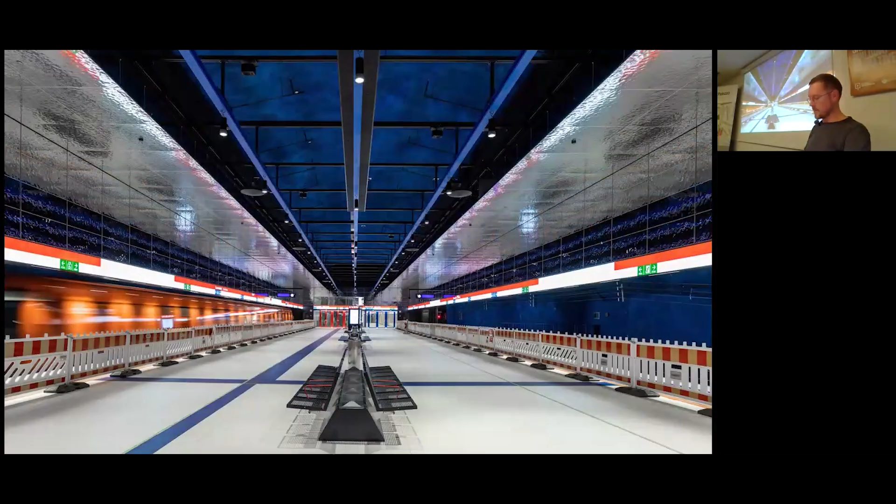Espoonlahti is best known for its swimming hall, so there's some reflection of that. And this is a station that's so deep in the rock that it only has very big elevators, because it would take too long to take an escalator. So it has a bit of the rock forms that exist; the whole area is on this hill.

And this is one of the suburbs with very straight lines and long buildings and towers. So it's simple but recognizable. But I think I'll finish there.